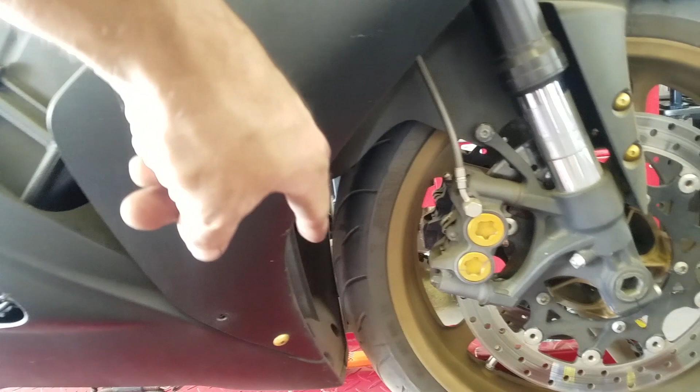All of the bolts on the cowling all the way down, and then separate from inside. There are some tabs and some areas to disconnect there. Always have a place to put any parts when you're pulling them off. For my purposes, what I'll be using is one

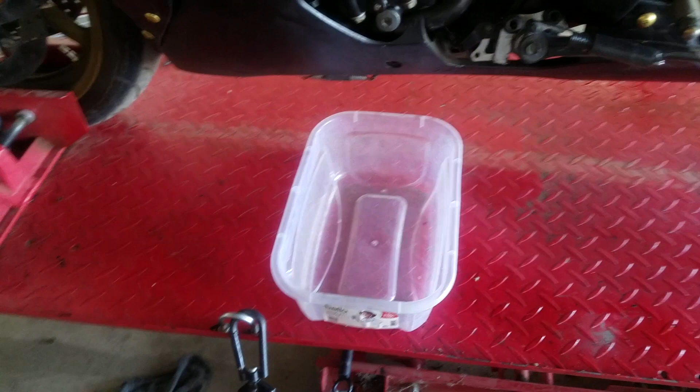small container for all of the external bolts that are coming off of the bike before I get to the engine coming apart. So that means fairing bolts, mount bolts, engine mount bolts, any bolts that come off of the engine or off of the chassis of the motorcycle will go into that bin right away. That way you don't lose anything in the process of taking this thing apart.

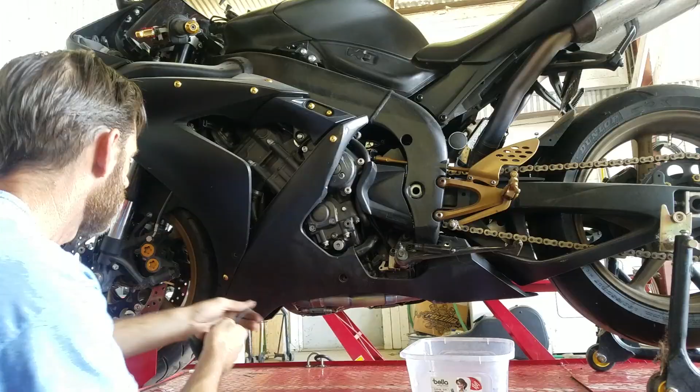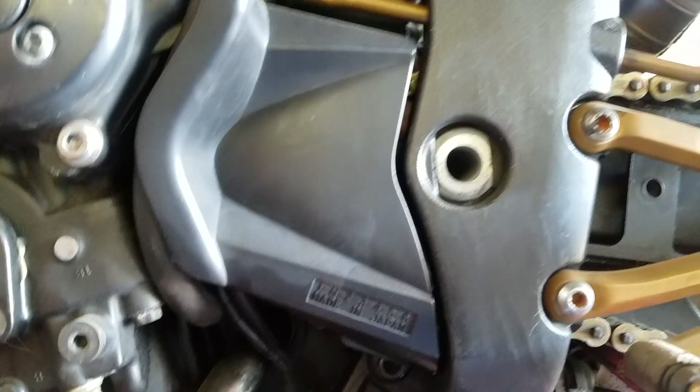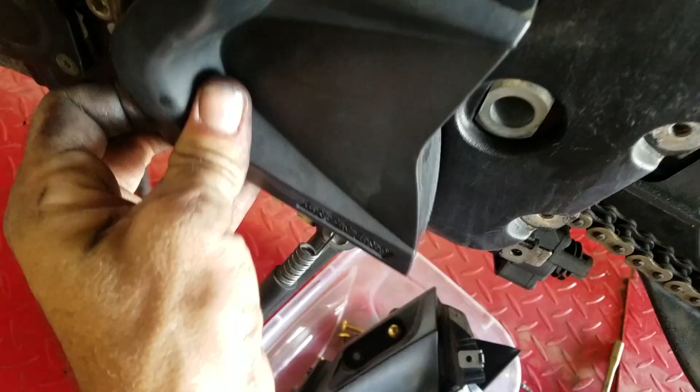So next, we're going to remove the shift linkage at this nut here. Then we're going to remove the rear set and get that out of the way. Remove the sprocket cover. Jesus. One thing I hate is when people over torque bolts. You'll have to tug a little bit. There you go. Alright, now you can see your countershaft sprocket. So let's see.

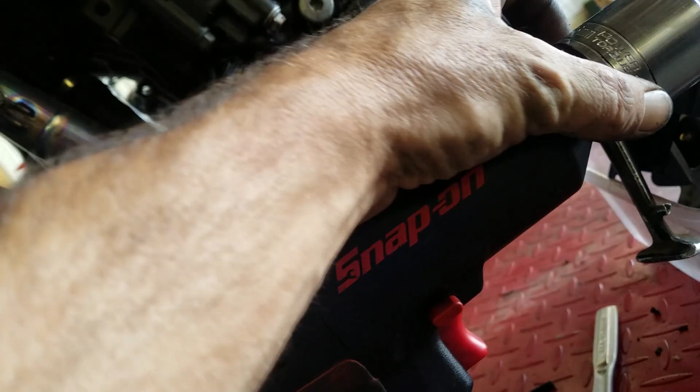Next is lock nut, shift rod, shift arm, drive sprocket cover, sprocket nut, lock washer, drive sprocket and plate. So basically, you take off the drive sprocket. If you don't have something like this, I really recommend getting one. Drive sprocket is a 36 millimeter. I'm not using an impact socket.

This is a no-no. Unfortunately, I can't find my other 36 mil. I don't know what's going on. So I'm gonna hope that this does the trick. Should do with no problem. So you just go ahead. Now, obviously, if you don't have something to do that with, well, then you'll have bigger problems, but it should come off.

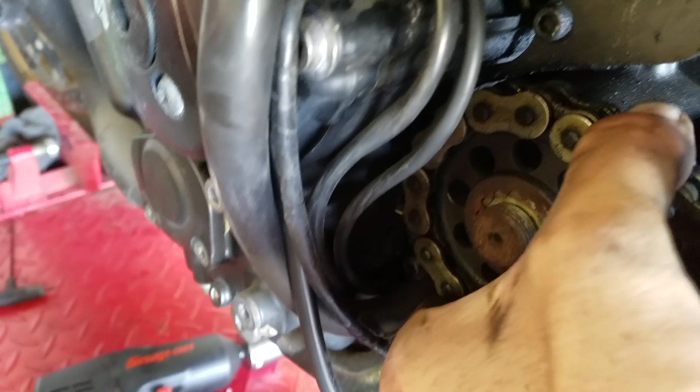You'll want to lock the rear wheel with a 2x4 or something like that, and a breaker bar should get it off. Alright, so once that's off, you're just going to pull the drive sprocket off, get the washer and everything off. The chain can come with it at this point. Just wiggle it back and forth and give it a tug. It'll come out, and you can then remove the sprocket.

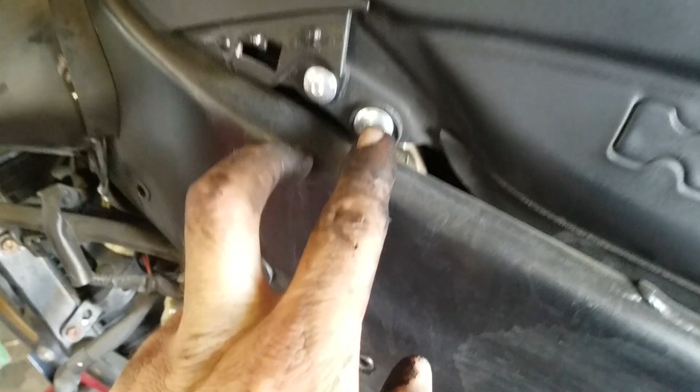Next, you're going to remove the rider's seat, passenger seat, and then you're going to remove the tank. A little bolt on each side here. You're going to have a single bolt up on the front there, and your rear seat mounts are up under the back of the seat. This one's missing one, but it's got the other, so remove those two bolts, pop the seat right off, and then I'll show you what's up underneath there for removing the tank.

To remove the front bolt and the two side bolts that hang onto these brackets here, you can then tilt the tank back, use something to prop the tank up, and that way you can get up under here with both hands and remove all of the plugs and the fuel lines from the tank. You may have some trouble.

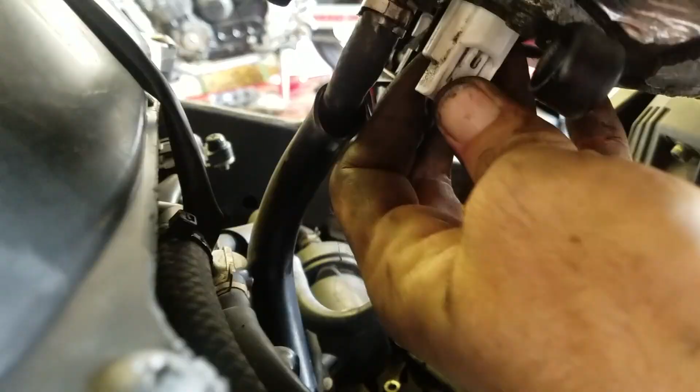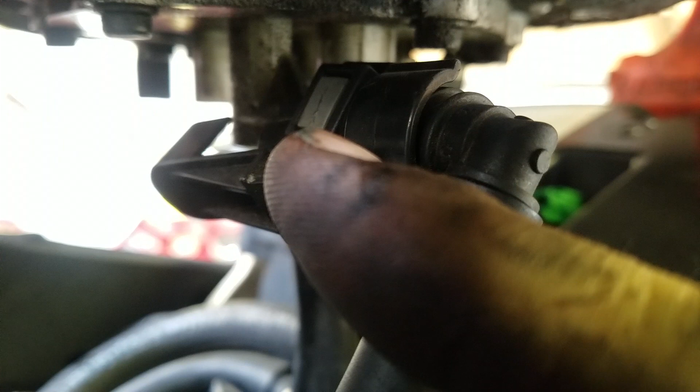A lot of people seem to have some pretty major trouble sometimes with the fuel line itself. If I could get you to see in there, you got one of these little gray spots on each side. You're going to want to squeeze those together at the same time, and then you should be able to wiggle the line off. Here we go. Remove this guy right here, and you can pull the tank right off. It's best to actually drop the tank back down and just let it rest on there while you undo the hinge bolt here.

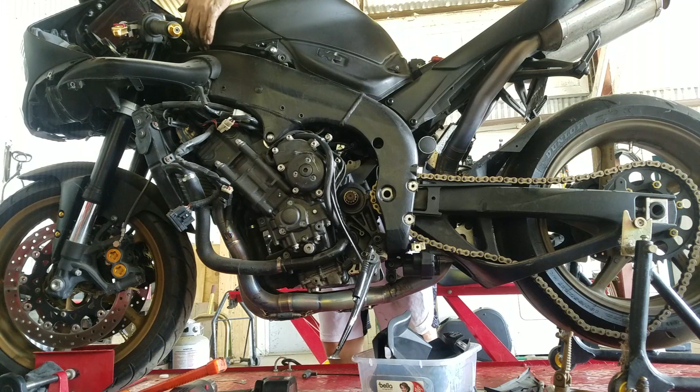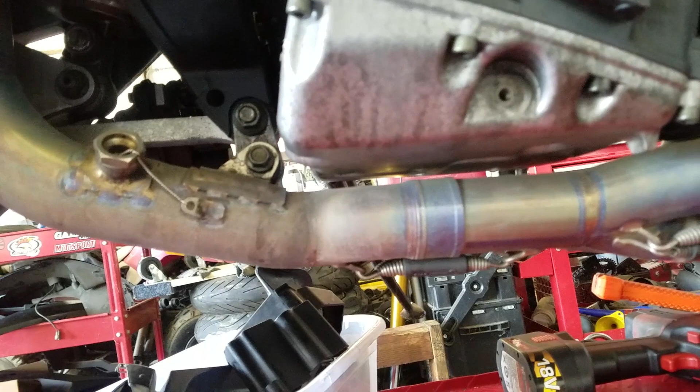Okay, next step after you've got all of that stuff off, the reason you're doing that is because you're going to be removing the exhaust system. You've got to have everything out of the way to get that motor out. So you're basically taking off this exhaust. This has got an aftermarket Akrapovic exhaust, so at least up to the rear cans, which basically is all of

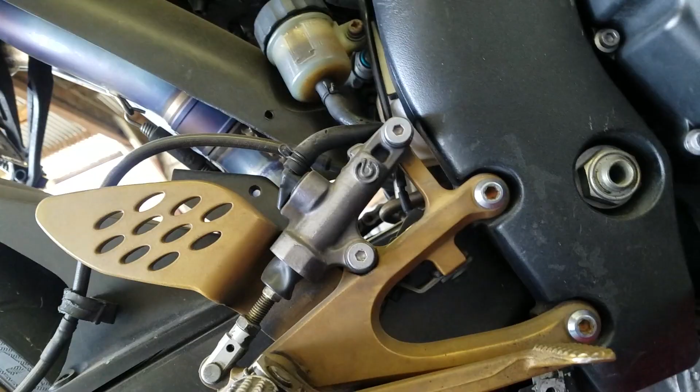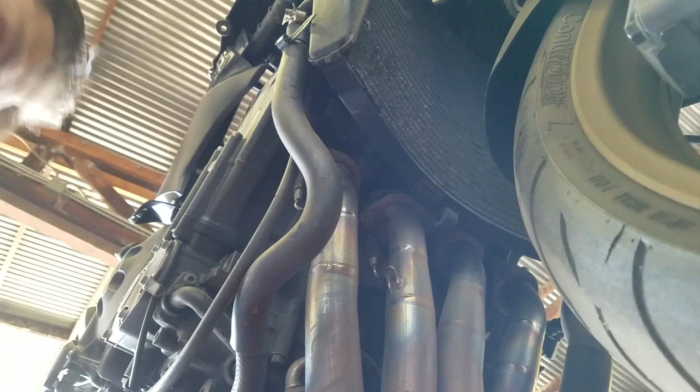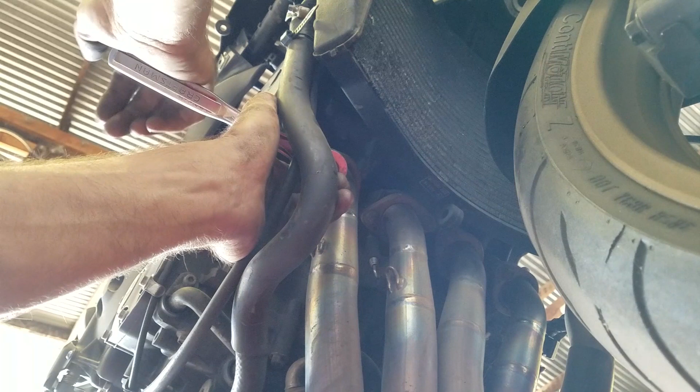the way off. So with that, on a stock exhaust, you're going to start in the same direction. You're going to start at the header, and you're going to remove backwards. These pipes have a 12mm head on the nut. When you're loosening nuts and bolts, it's always good to give it a nice pop instead of trying to pull with constant pressure. You can round off the head of the bolt real easy, especially if you're using 12-point sockets. So just get it up there and give it a good whack, and that'll crack it loose.

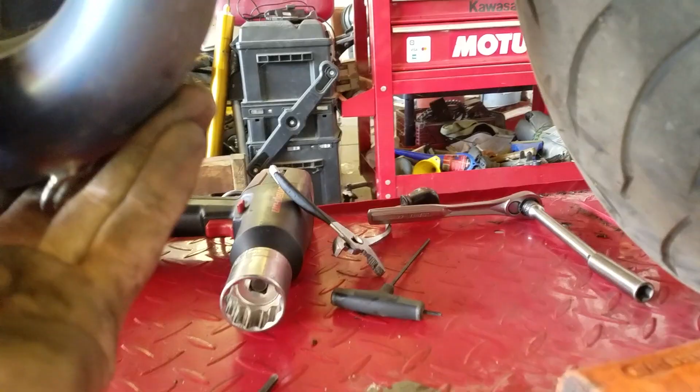Alright, once you've got the clamp off, you can pull that out of there pretty easily on this aftermarket exhaust. Most of them are going to go together like this. With your stock exhaust, you've got a little bit more to pull off.

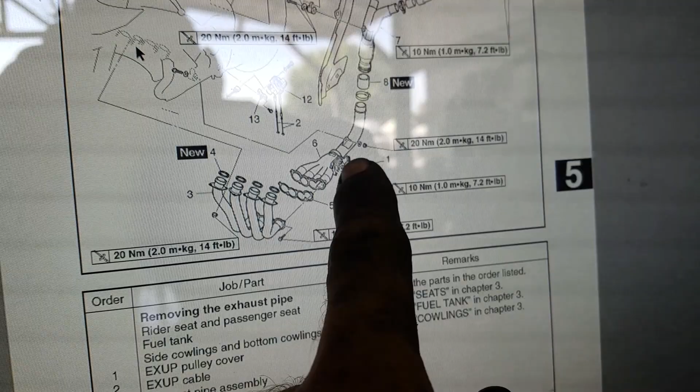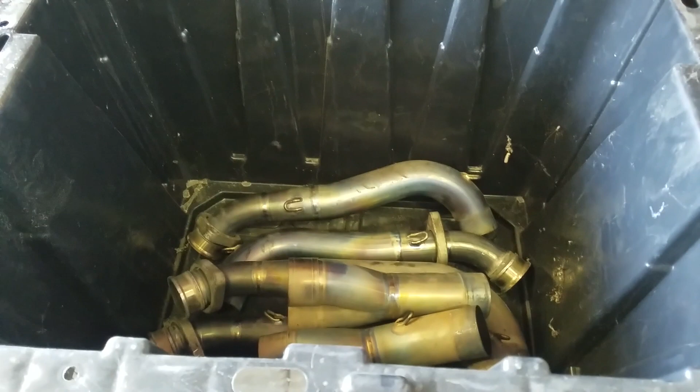And with that, you're going to take off first the exhaust pipe assembly like we're taking off, and then it's going to go down into your 4-into-1 area, which is basically right around your EXUP valve. You'll need to disconnect all your EXUP stuff if you still have this on the bike. Like I've done with all of those, I'm boxing up all of that stuff. So keep everything organized, a place for everything and everything in its place.

Clamps for the canisters are up underneath the back seat. There's one on each side, back here too, right under my finger. And you'll loosen those up and you'll be able to... I needed both hands to do that, and I don't have my tripod.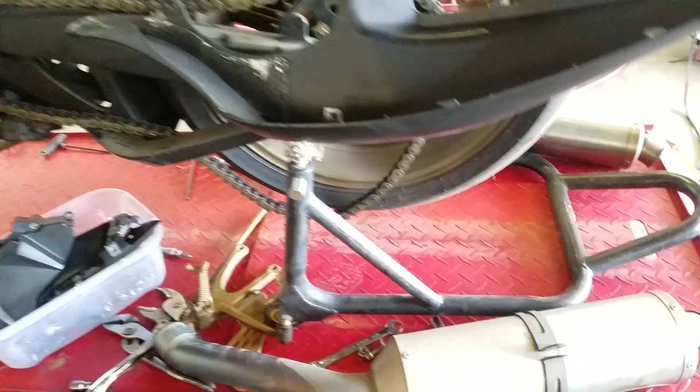I went ahead and released the springs and unscrewed the bolts, pulled the tailpipes off, and the last remaining piece on the exhaust is this bad boy right here. So you finish getting the bolt out of that, and then I'll be able to pop that bad boy out. And then I'll be clear on the bottom so I can drop the engine out when it's time.

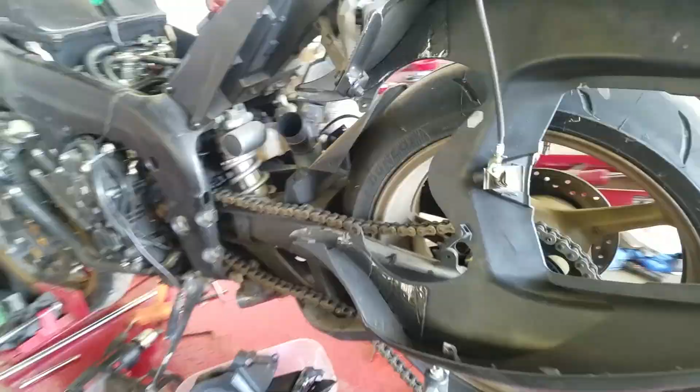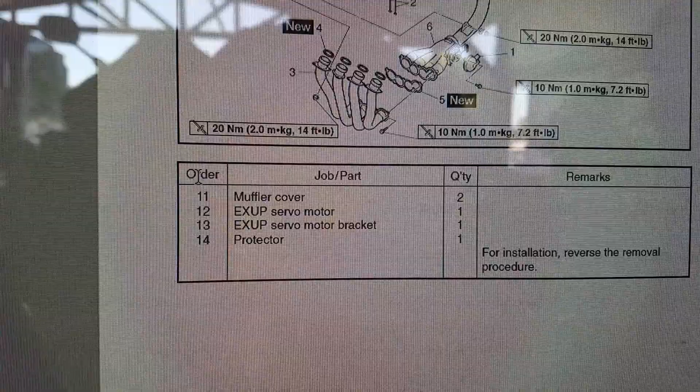Alright, at this point, on this particular bike, I'm going to skip this part because I don't have the EXUP system on it. But you're going to want to remove the muffler cover, EXUP servo motor bracket, and the protector at this point.

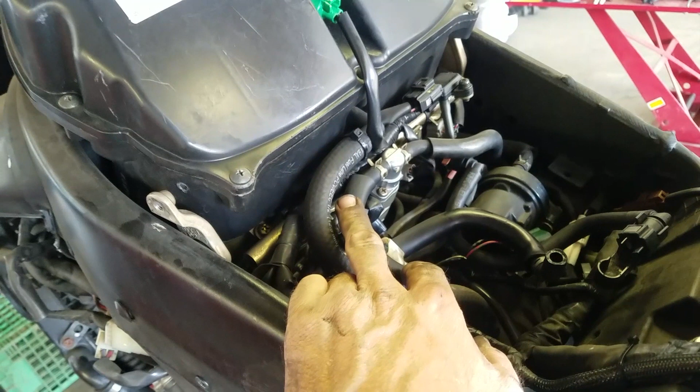Okay, so we're staring at the airbox here. You can probably leave the throttle bodies on the motor, but we're going to be taking the motor apart anyway, so I'm going to go ahead and remove the throttle bodies now. You do have to remove the top of the airbox in order to take the airbox off. Remove the Phillips head screws all around the outside of the airbox.

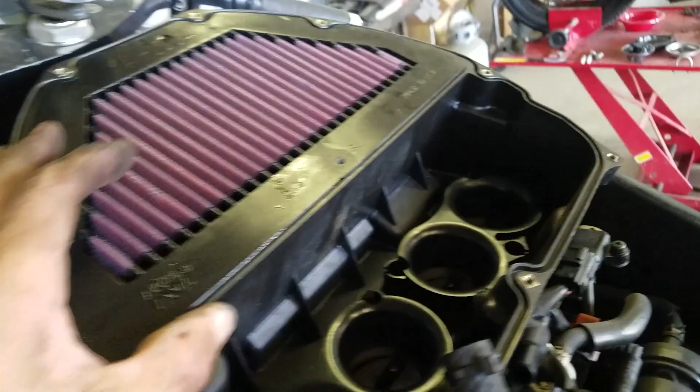Once everything is unscrewed, you can remove some of that stuff. We can actually remove our breather as well. It's gonna come off, but now you just have to get at these little guys there and she'll come right off. Just like that.

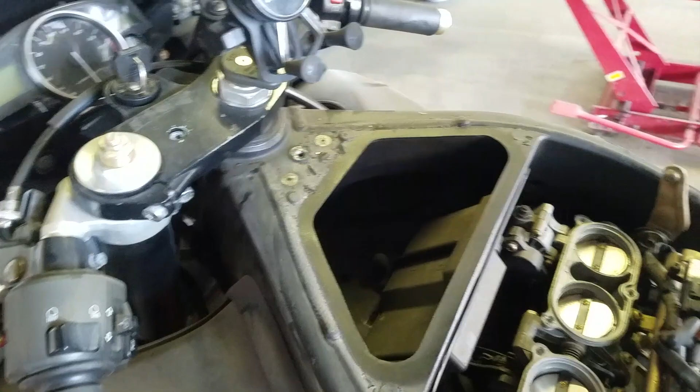Okay. Pull that right off. Now you're gonna have some hoses and some stuff attached maybe. Nope, not in this guy's case. Pull the whole thing up and out of the way, and there you go. You're staring at your throttle bodies.

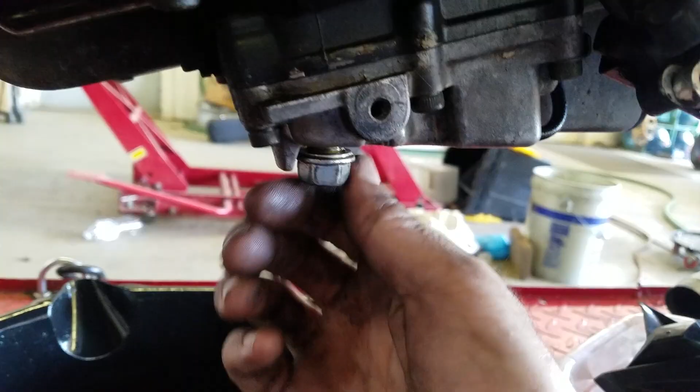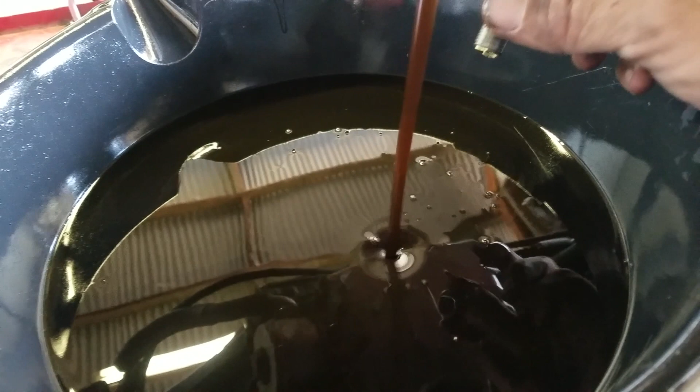Okay, if you haven't by now, it's probably a good time to drain the oil. It's here to get the engine removed, potentially taken apart. I'm looking for anything that's not good in there. We did hear some knocks and stuff. Might be a little milky. Don't see anything abnormal yet though.

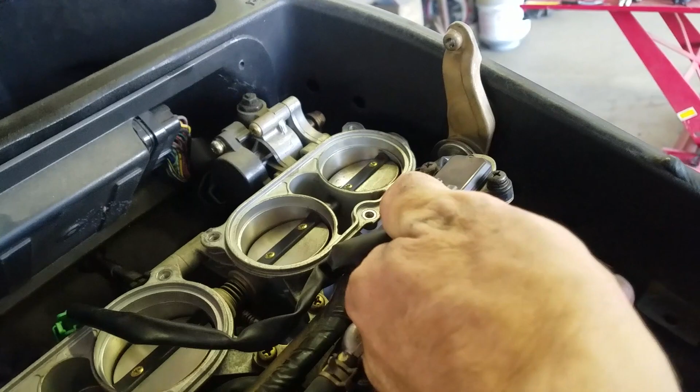Get these throttle bodies out. You've got quite a bit to get into and get out. A lot of the main stuff you're going to want to disconnect from the wiring harness, obviously. So main sensor plugs, you're going to ditch those. They are coming with the throttle bodies. On your idle adjust, while you're down here, just go ahead and remove that. It'll be the last thing you think of, and you'll be yanking the throttle body up going, what's it grabbing on?

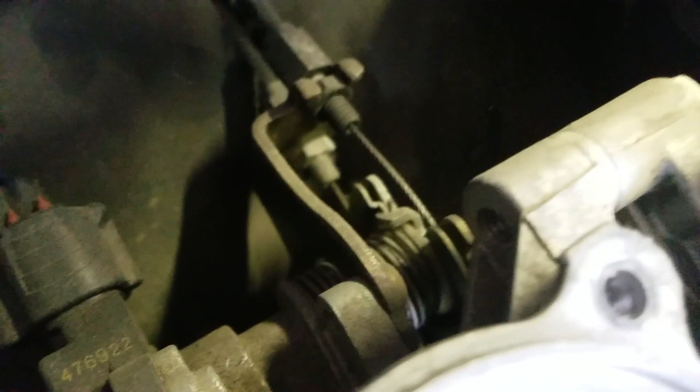You're also going to have to remove the ECU to get to the throttle cables a little easier. Throttle cables are down here. It's just easier to get to them if you have this bad boy out of here. So go ahead and grab yourself a number 4 Allen wrench, and that should drop that thing out of the way, and you can get the ECU box out of there. So I'm gonna start unplugging.

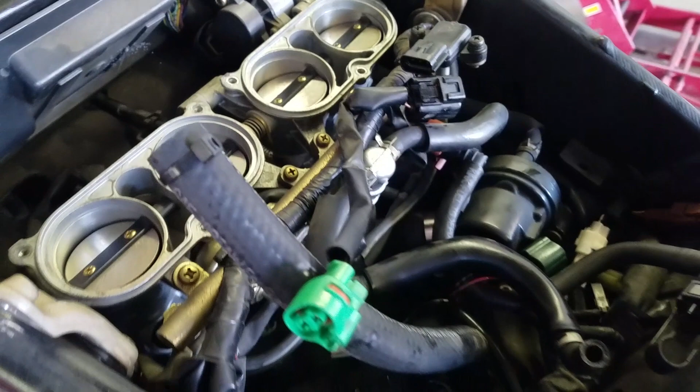You do the same. Yeah, I went ahead and jumped ahead and got the throttle bodies out because you need 2 hands, and you can't really get a camera up in there without somebody helping you. So there's a lot of stuff you've got to disconnect. Take the ECU out. It's just easier to get down to the throttle cables when you've got to get underneath all of this stuff and unplug other sensors and wires and all these hoses and all that.

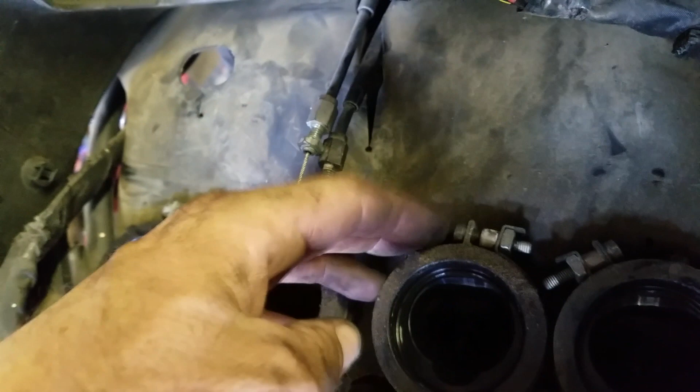So once you've got everything disconnected from the throttle bodies, you just give them a pry after you've loosened the clamps. You'll probably have to get at the clamps from outside over here, using a long extension. I don't know why this one was backwards, but somebody has this one going this way. These should probably be flipped around, and I'm going to look into that when I put it back together.

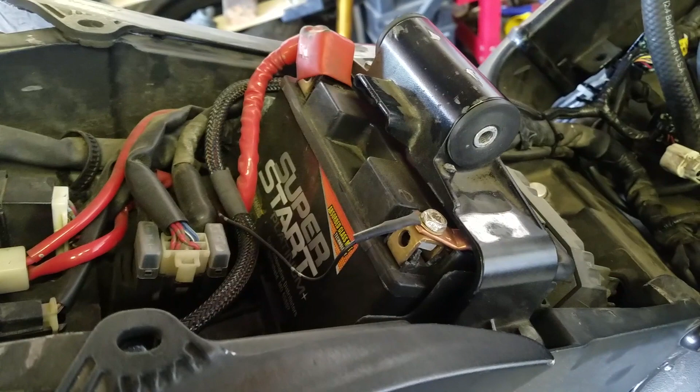All right, at this point you're also going to start pulling some electrical stuff, so go ahead and disconnect the battery, the negative terminal. So this whole cover's going to come out, this whole rubber thing here. You can fish it out of there as long as it's taken off with the proper connections on the outside.

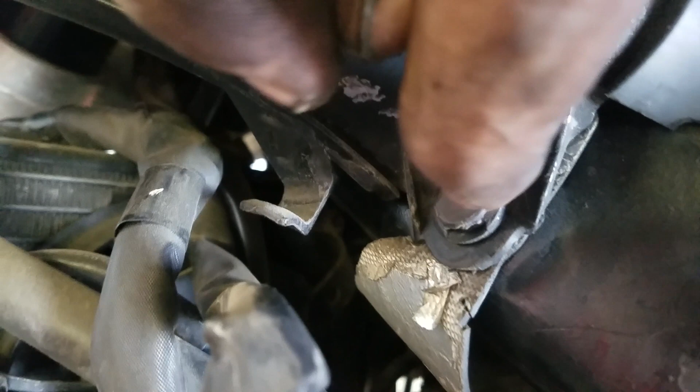If you notice, you've got some of these buttons holding on to it. Pull those buttons out and wrap that up and out of there. You can salvage it best you can. It keeps everything clean when you're putting everything back in it and you're riding a bike down the road. Plus, you can clean everything out.

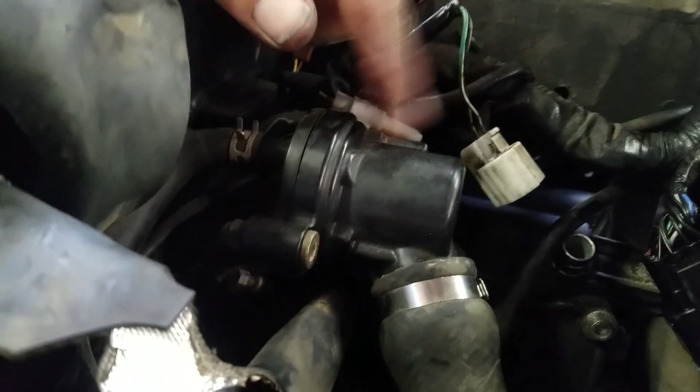It's nice. From here, though, I do have bare open holes, and whether or not I'm going to be rebuilding this engine, I do want to keep any debris out of those, so just stuff some paper towels in there, some shop rags or something like that, and keep debris out of them. You're going to need to take this bad boy off, and the manual recommends that you take the oil cooler off as well.

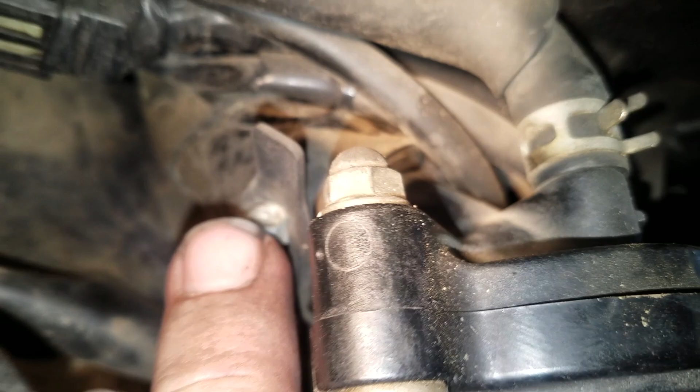Alright, now to pull that up for the air cutoff valve, it just pops up from there, and loosen that hose up prior to doing that. Get this hose off and you can pop it right up and out of the way. And then you'll want to get down and remove this clamp here and this hose, and remove those hoses and get that thing out of the way.

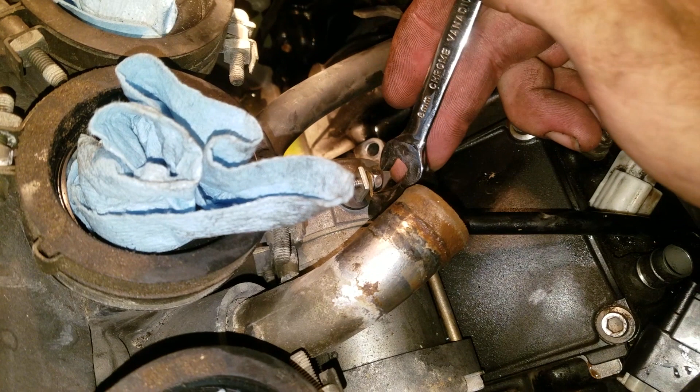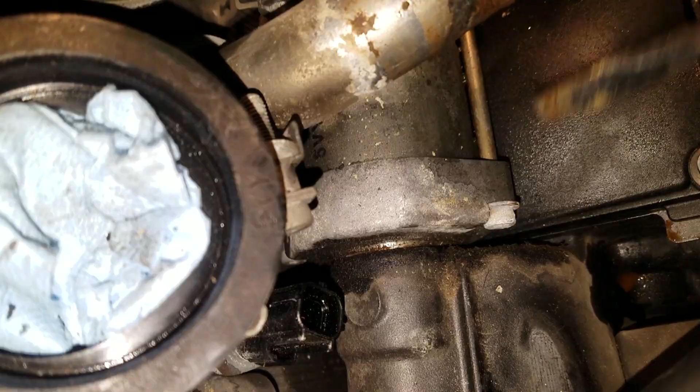You're going to pull out the starter. Starter motor's got a screw down there and one down there. And get to that bad boy best you can. Remove the starter motor. Okay. Next thing you want to do is disconnect the starter terminal wire, and just get that off of that starter. After you've disconnected those bolts down there, you can see that they are missing. Once you get this little guy out, you free up that wire, give it a little twist.

And away we go. Okay, getting some movement here. Getting a little movement. And there we go. So, you'll get that bad boy out of there. Yep, like that. There we go.

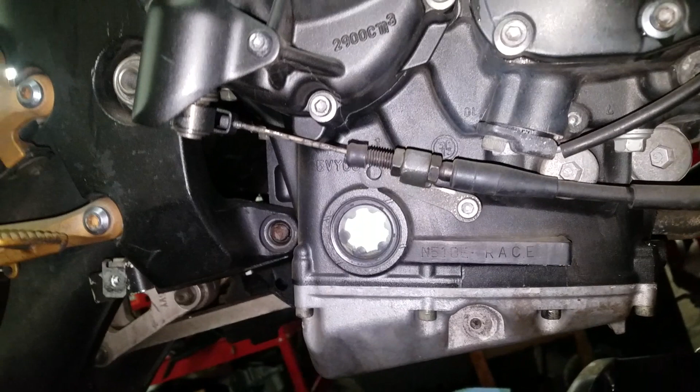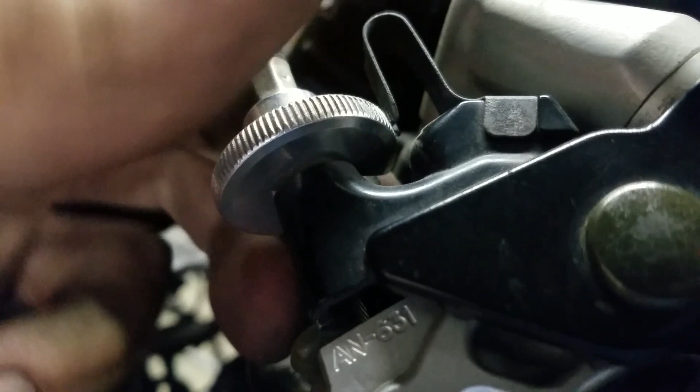Alright, next thing you're going to be getting off is the clutch cable. Yes, sir. And obviously, if you don't know how to take the clutch cable off at this point, and you're trying to remove the engine on your bike, call a friend, because you don't want to necessarily be doing this if you don't know what you're doing.

This is Millie, everybody. Hi. Oh, you're a good girl, huh? Millie's a good dog. Millie, you're licking my ear. Good. At least you're not a mosquito, like all the other mosquitoes. Okay. Millie, you want to let me get back to work now? You're going to be famous. She's so photogenic, huh? You ready to be famous? Famous dog. Alright, go on.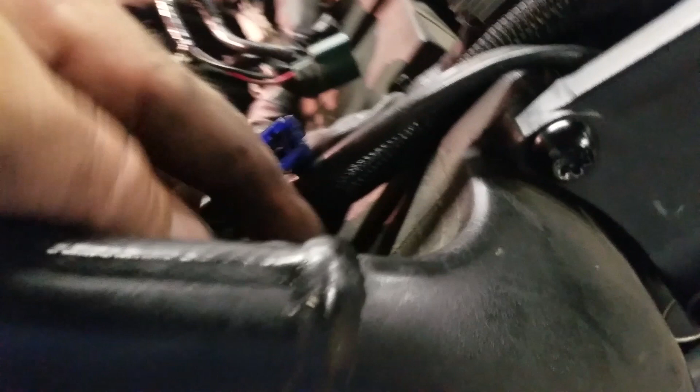The clutch cable's removed, moving on to the ground coupler. So just go ahead and grab your T-handle or whatever you need to break that bad boy out and take these ground wires off. You don't want those hanging on because those are attached to the bike and all that stuff. All of the other little couplers, all of these little bad boys, you're gonna need to definitely trace your stator line up. It goes up to your regulator rectifier.

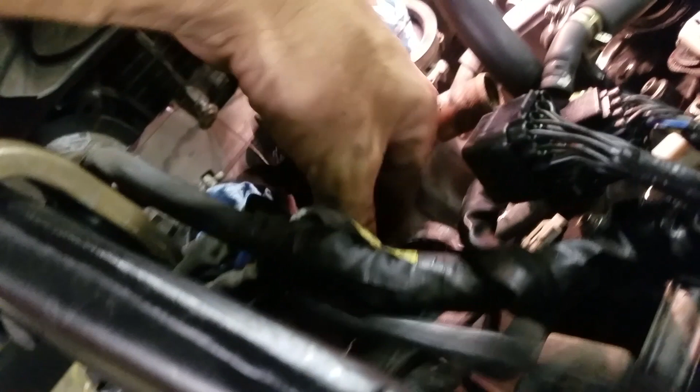I've already pre-popped mine loose, but get that out, get that free of anything, because you definitely don't want that bad boy dragging on anything when you remove this thing. So I usually like to tuck it all the way out of any wire before I even start thinking about taking the engine out.

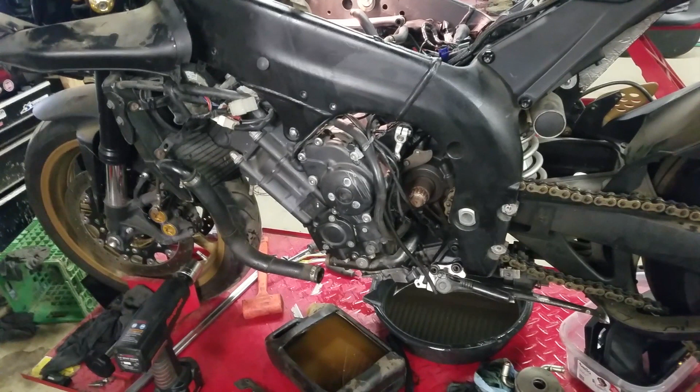Now, when I get to this part, as far as being about to drop the engine out, I'm actually going to get the bike off of the lift here. I don't want to drop it here. The lift that I have to lower the engine out is a floor lift. So we'll get it down on the ground and put it back on the bike stand. And I have a friend that's going to be over here in a few minutes, so maybe he'll want to help me get that thing off.

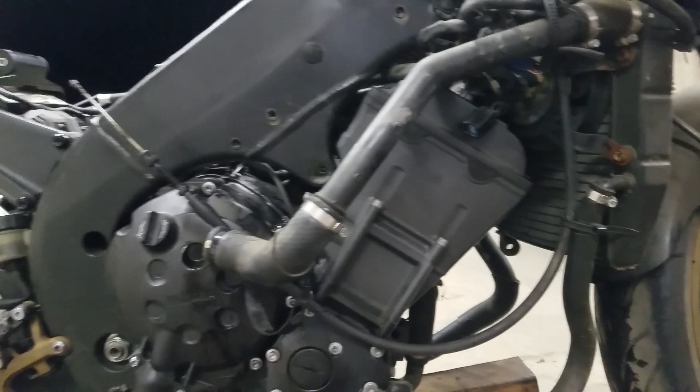All right, we're about to drop an engine out of an R1. Engine supported with my jack, and first thing we did was pull out that top front right bolt, per the manual. We got a little daddy long legs down there too. The next step is probably going to be the left side.

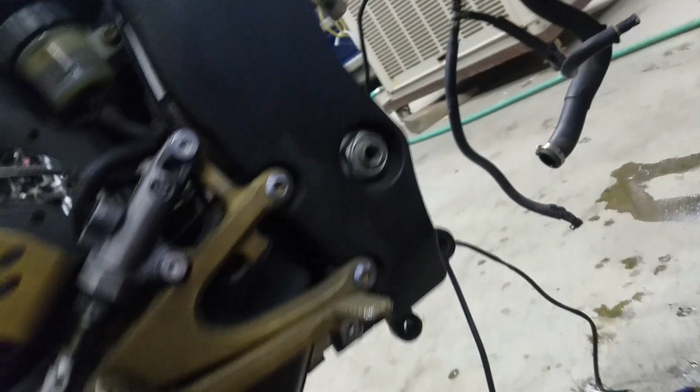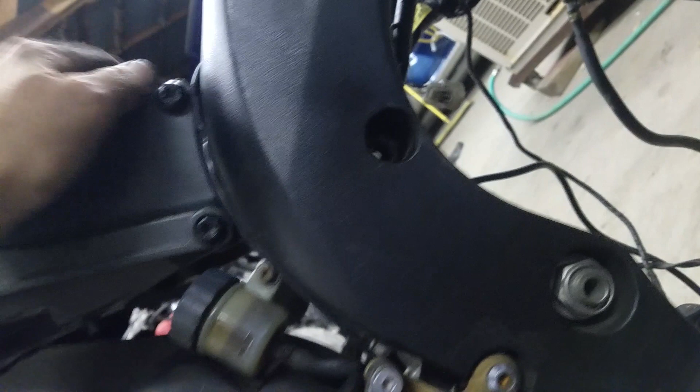You're going to take out the right side bolt and then the left side bolt while you've got the engine supported, and then it calls to remove the lower bolt here, and that comes out from the left side, and then you'll come over here and remove the nut from this one and then remove the bolt through that. And once you've got it all down, you can lower the engine down and pull it out. As long as you've got all your things disconnected, it should come right out. So there we go, engine on a platter.